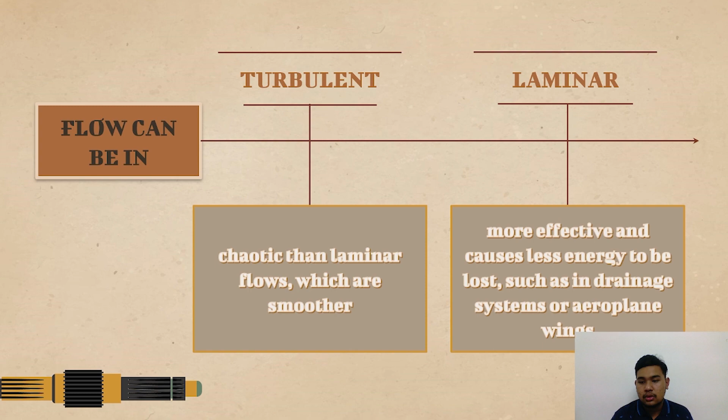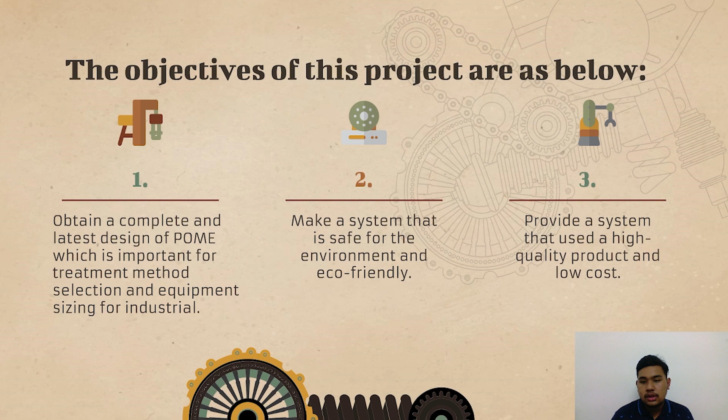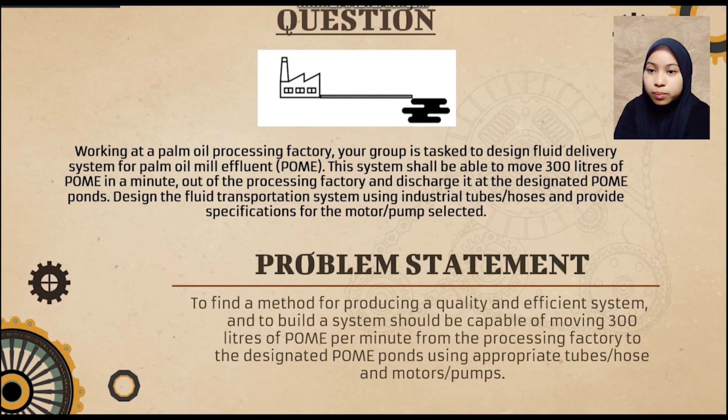DE210108 from section 3. So the problem statement for this project is to find a method for producing a quality and efficient system, and the system should be capable of moving 300 liters of POME per minute from the processing factory to the designated POME ponds using appropriate tubes or hoses and motors or pumps.

Next, for the FILA table, the problem format is like the problem statement. The facts: number 1 is to design a fluid delivery system for palm oil mill effluent, POME. Number 2, the system can move 300 liters of POME in a minute out of the processing factory. Number 3, the POME is then discharged to the designated POME ponds. Number 4, the POME can cause water pollution.

The ideas from my group: firstly, we want to use a pipe that is long-lasting, wide in diameter, and able to withstand heat. Number 2, we want to use a high pressure pump to make the fluid move faster. Number 3, we want to make a wide pond able to hold a lot of POME. Number 4, do water treatment once a week or apply a water filter to avoid pollution.

And then the learning issues. Number 1, what types of pipes can be used to deliver the fluid? Number 2, what is the specification of the pump used? Number 3, what depth and width of the pond is suitable to hold the fluid? And number 4, how much does it cost to build a water treatment building?

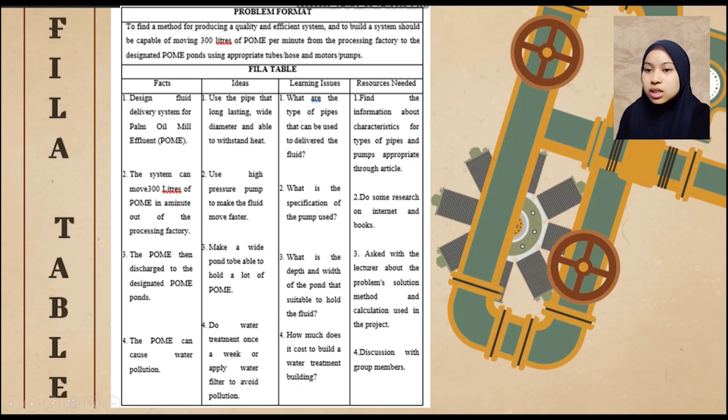For the discussion of our PBL, idea number 1: use a pipe that is long lasting, wide in diameter and able to withstand heat. For this idea, we use stainless steel pipe because it is stain and corrosion resistant, environment friendly, low maintenance, and lastly, strength and heat proof.

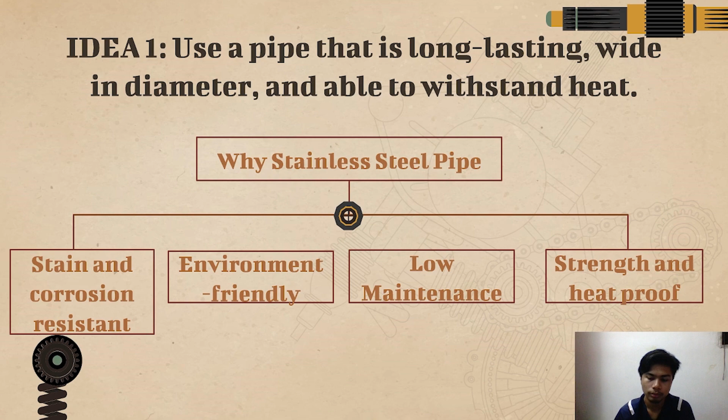Number 2, use a high pressure pump to make the fluid move faster. For this idea, we use a centrifugal pump because it is corrosion resistant, low maintenance, has smooth flow, energy efficiency, and proven reliability.

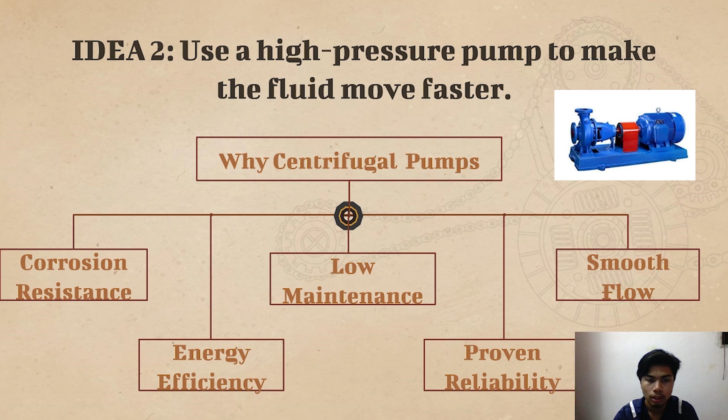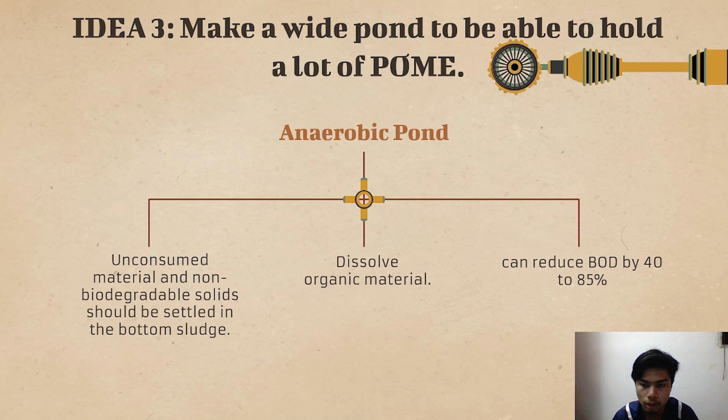Next, the third idea, make a wide pond able to hold a lot of POME. For the pond, we choose an anaerobic pond because unconsumed material and non-biodegradable solids settle in the bottom sludge. Number 2, it dissolves organic material. And number 3, it can reduce BOD by 40 to 85%. So this is our design for the pond.

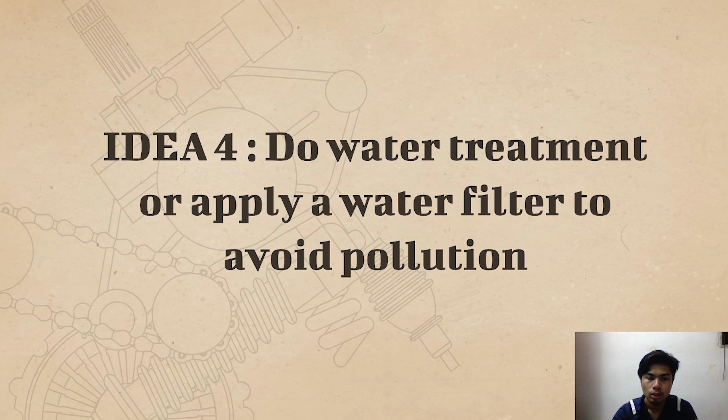Idea number 4, do water treatment or apply a water filter to avoid pollution. For this idea, we choose the design of a POME polishing system where the raw POME from the sludge pit is pumped into the heater via a feeder pump. Steam will be used as a heating medium to evaporate the water from the POME. When the POME is evaporated to the required concentration, this fraction will be pumped out as solid concentrate.

The evaporated vapor then goes through a condenser with the cooling water acting as a condensing medium and comes out as process distillate. After that, the liquid will be treated until it becomes clean water at the water treatment factory.

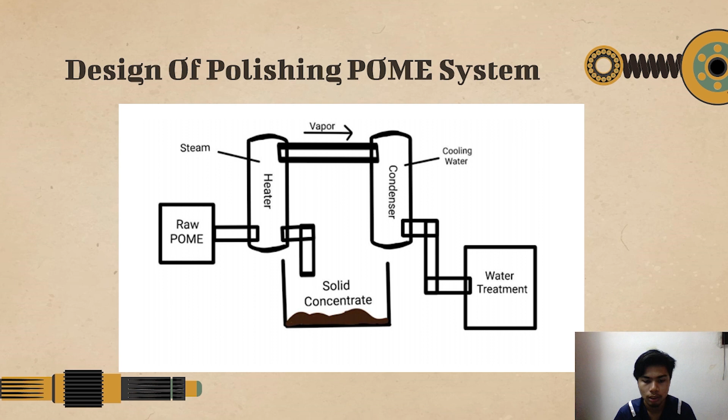So I will continue with calculations. We assume the diameter of pipe D equals 0.2 meter, radius of pipe r equals 0.08 meter, density of fluid equals 1020 kg per meter cube, dynamic viscosity of fluid is 0.034 Pascal second. First we calculate the flow rate Q, 300 liters per minute. So we get 300 times 0.001 divided by 60, and Q is 0.005 meter cube per second.

Next, we calculate the velocity by dividing the flow rate by the area. So Q over pi r squared, 0.005 over pi times 0.08 squared. And we get the velocity of 0.2487 meter per second.

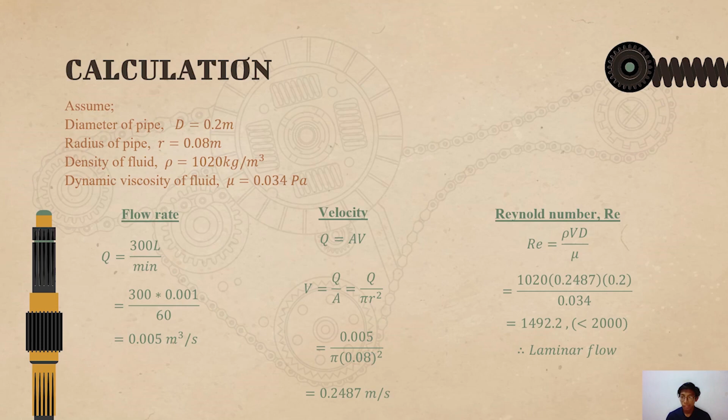Next, we calculate the Reynolds number Re by multiplying the density of fluid, velocity, and the diameter of pipe divided by the dynamic viscosity of fluid. So 1020 times 0.2487 times 0.2 divided by 0.034. So we get 1492.2, which is laminar flow because laminar flow is below 2000.

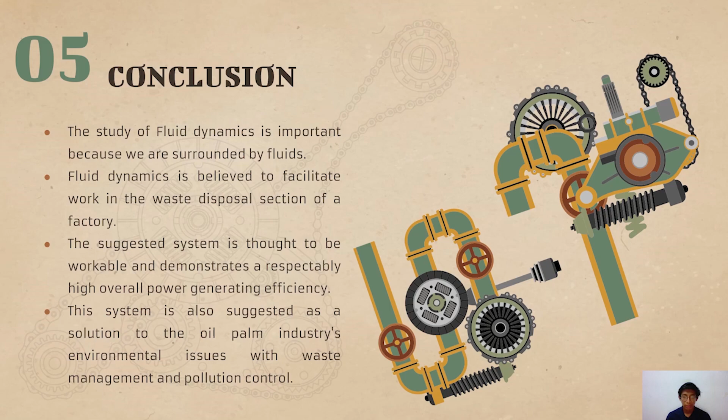So lastly, the conclusion. The study of fluid dynamics is important because we are surrounded by fluids. Fluid dynamics is believed to facilitate work in the waste disposal section of a factory. The suggested system is thought to be workable and demonstrates a respectably high overall power generating efficiency. This system is also suggested as a solution to the oil palm industry's environmental issues with waste management and pollution control. So that's all from our group, Group 11.